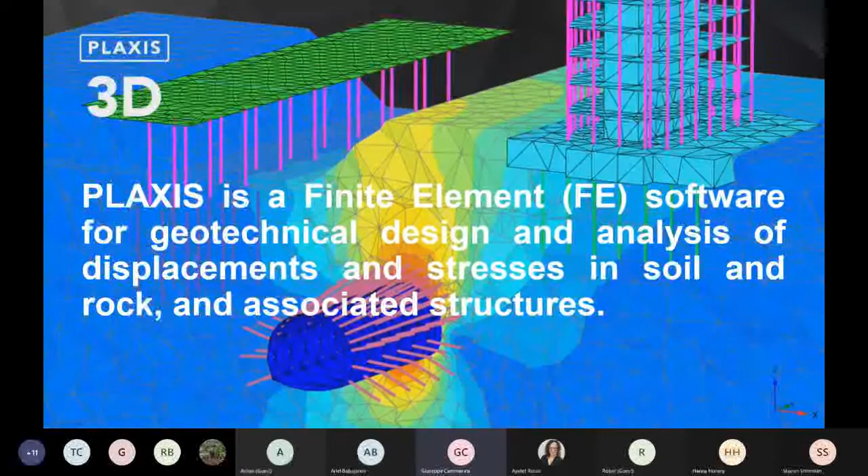So what are the features of a modeling software such as Plaxis that make it an efficient tool? The modeling approach has to be user-friendly with an intuitive workflow, but at the same time, the results of the calculation have to be reliable and thus based on robust developments and implementations.

Because geotechnical engineering deals with natural and complex materials, their behavior has to be accurately described through the most appropriate constitutive law. So a comprehensive library of material models is of paramount importance to benefit from advanced modeling. In addition, as anticipated, soil-structure interaction is crucial, and thus there is a need for proper structural elements simulation within the geotechnical framework. All of this is associated with the possibility for the operator to display a comprehensive set of detailed results. Finally, the tool has to be usable in every project stage.

As anticipated, Plaxis provides a user-friendly and intuitive workflow based on modes. There are five modes: the soil mode, where soil conditions are defined; and the structure mode, where structures and loads are created. The geometry is modeled via predefined structural element types and loading types using CAD-like drawing tools, leading to fast and efficient finite element model creation.

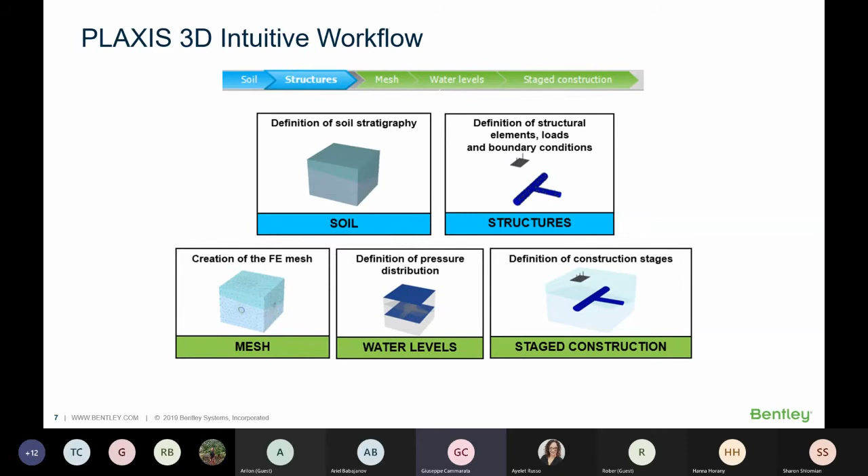For geotechnical simulation, the adoption of the most suitable constitutive law is crucial for the reliability of the results. Within this framework, Plaxis offers a comprehensive library of models for both soils and rock masses. In addition to standard models, it offers a set of user-defined soil models programmed in Fortran and compiled as DLL, and also provides the possibility to add UDSMs developed directly by the user.

Thanks to the soil test facilities in Plaxis, the user can carry out comparison of the behavior as defined by the soil model, based on the entered set of soil or rock parameters, with the results of laboratory and site investigation. This very useful tool is aimed at the optimization of model parameters such that the best fit is obtained between the model results and the test data.

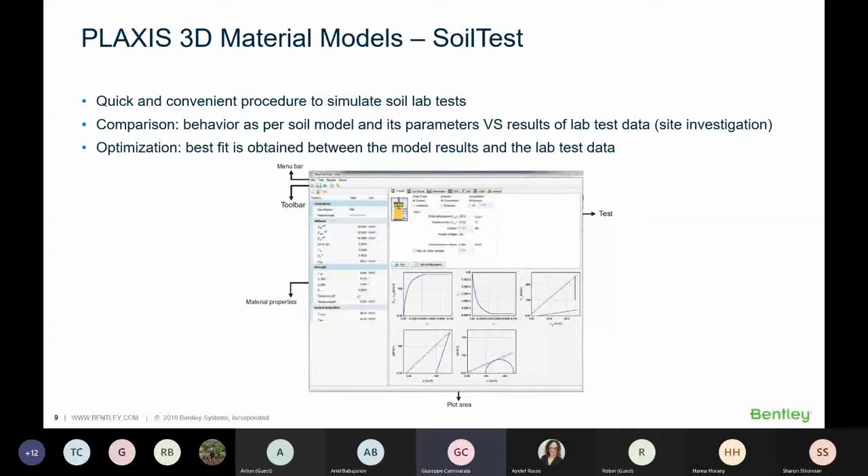In addition, as said before, soil-structure interaction is crucial, and thus there is need for proper structural element simulation. With this regard, Plaxis offers a wide range of different structural elements that can be easily used for any engineering application. To all of what has been shown so far, Plaxis provides powerful post-processing through the versatile output program.

This offers various ways to display forces, displacement, stresses, and flow data shown in contour, vector, and isosurface plots. Cross-sections can also be displayed, and graphs created, allowing a detailed inspection of the results.

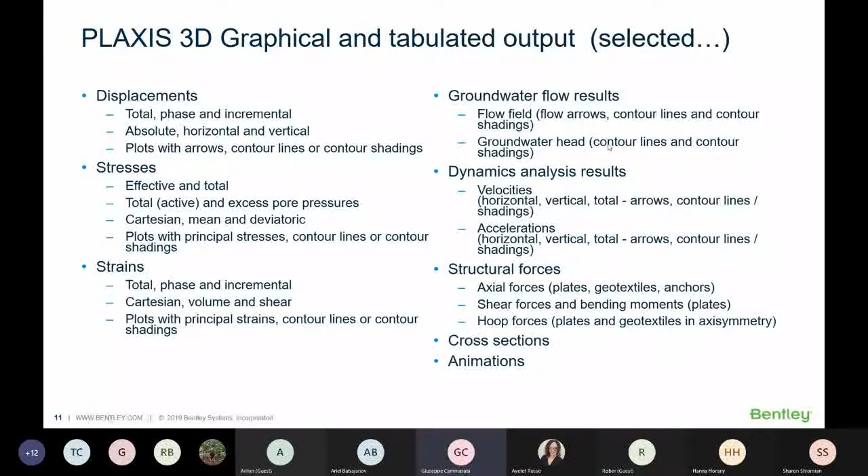Let's now have a look at Plaxis' advanced capabilities, starting from groundwater flow, which is an important issue in many engineering fields such as geotechnical, environmental, and hydrological engineering. With this advanced feature, users have the possibility of considering transient flow, performing different types of calculation where the interference between the flow field and the strain field can be taken into account, up to the level of fully coupled analysis. In addition, Plaxis offers various predefined properties to define unsaturated soil behavior.

Moreover, the user can also assign time-dependent variation of water levels or flux to model boundaries, as well as simulate various complex hydrological conditions. Applications would be, for example, excavation and mine dewatering, analysis of rapid drawdown, the effect of rain or flooding on slope stability, and drainage systems and pumping tests.

Plaxis has state-of-the-art capabilities for dynamic calculation. Dynamic problems may involve two different types of situations. In the first place, there are induced vibrations, which can be caused by traffic such as trains and trucks, by machines such as generators and wind turbines, or by construction work such as drilling and blasting. In the second place, there are earthquakes as a result of tectonic movement.

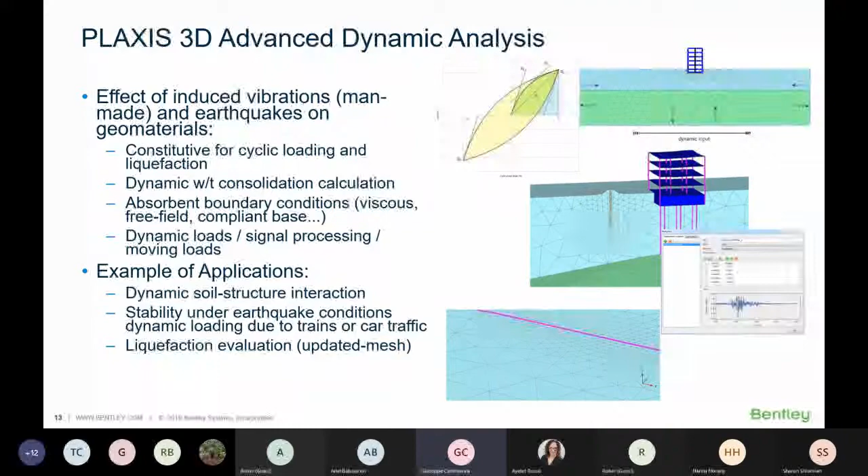Advanced thermal analysis is necessary when the effects of heat flow on the hydraulic and mechanical behavior of soils and structures need to be taken into account. In the current version of the software, the model is available in 2D only, but will be available in 3D in one of the next releases. Because of that, I will not spend more words on this feature for the moment.

So let's discuss now the reason for adopting 3D in design analysis by answering two classical questions that may be asked. Do I really need a 3D model? And what if I use a 2D model in any case?

Actually, only very few projects can really be considered 2D, and most projects have 3D effects. So modeling projects in 2D would mean that one forgets something, since it's hard to estimate whether omitting 3D effects is conservative or not. Generally, this is covered by applying all kinds of partial factors. This means that very often a 2D design is over-designed in order to cover the uncertainties of a 2D model for our 3D world.

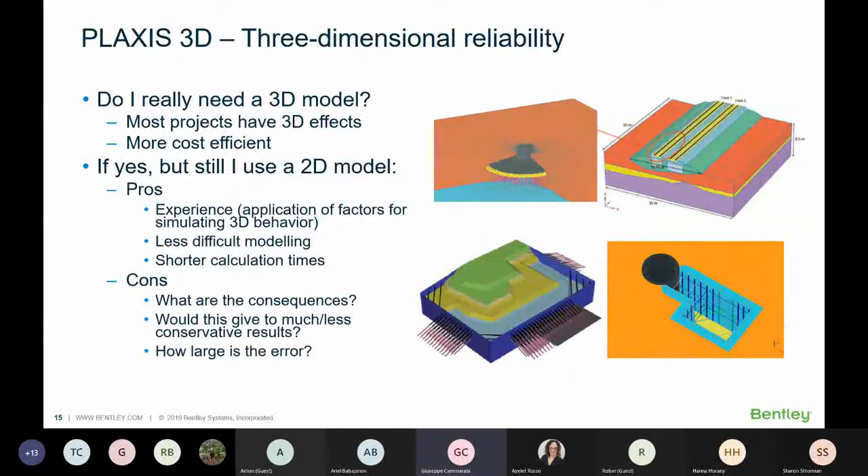In a 3D model, those extra factors are not needed, and thus modeling can be more cost-efficient than 2D. Let's try to better explain this with a very simple example sketched in this slide.

And by doing this, we accept to stand with the assumption of the plane strain model here reported. So one dimension is relatively long. There is similar geometry and stress or loading condition in any cross-section perpendicular to the long dimension. No strain perpendicular to the long dimension. No shear stress and arching perpendicular to this dimension. And the model represents one length unit out of the plane.

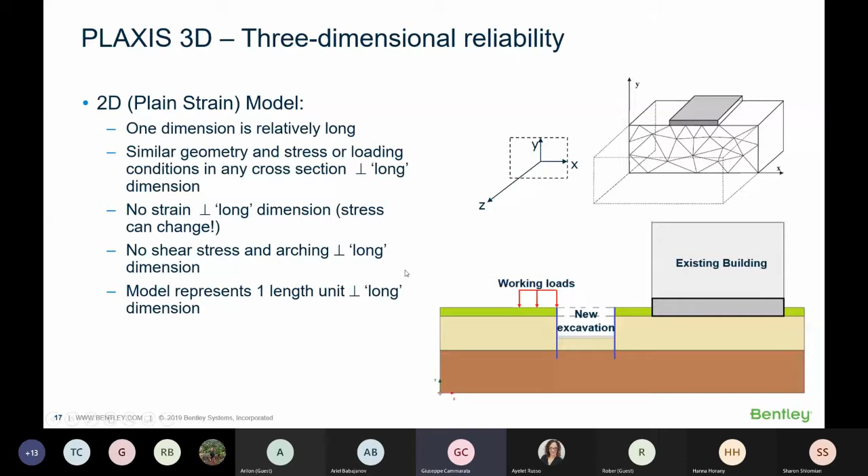It should thus be clear that by performing a 2D plane strain analysis of the situation presented initially, we are actually considering a 2D representation which cannot be considered as representative of the real one.

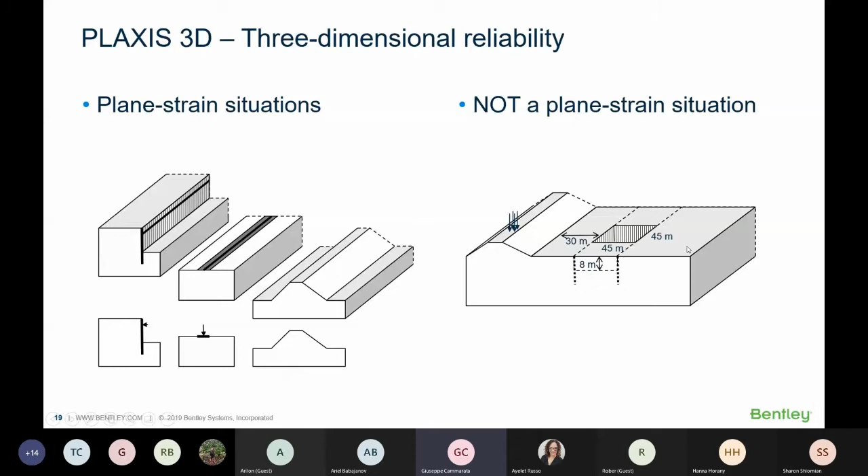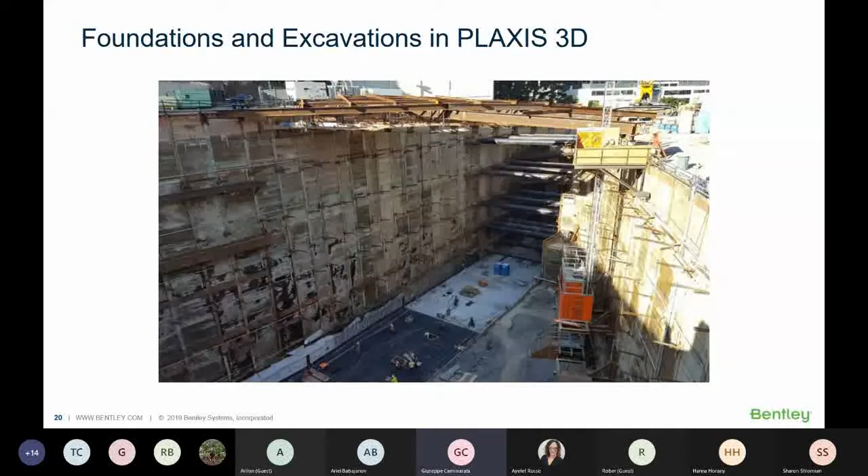Let's now show the peculiar aspects addressing modeling in 3D rather than 2D for several market sectors of civil engineering. The first is concerning foundations and excavation, which thus includes shallow, deep foundations, excavation, and a combination of the previous.

The first aspect that we have already previously considered and which might occur in any engineering project is the geometrical aspect, which includes also complex situations, such as the one shown in the slide where 10 basement levels are to be designed on a steep slope side.

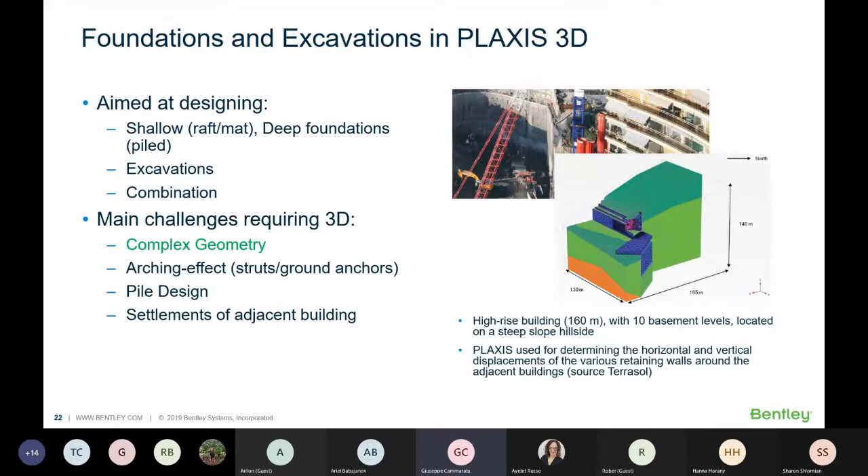High cost of traditional methods for stabilization of excavation pits encouraged engineers to study more about soil characteristics and their application. Arching effect is one of these characteristics that occurs in many geotechnical engineering problems, but does not always receive the deserved attention. In fact, it allows to provide safety and economy of project by optimizing the use of resources in the construction of discontinuous retaining structures.

When one is dealing with pile design, it is important to consider the behavior of the pile group. And for doing this, in Plaxis, the user can use the special embedded pile structural elements. There is also the possibility of simulating piles as volume elements, as the one represented in blue here.

But of course, there are problems when you want to simulate a pile group, because you will start to have lots of elements, which will be demanding in terms of calculation, but also with the possibility of bad element shapes in the finite element mesh. For that, the embedded pile, respect to the volume pile, allows you to simulate a large number of piles by taking into account all the peculiar behavior of piles.

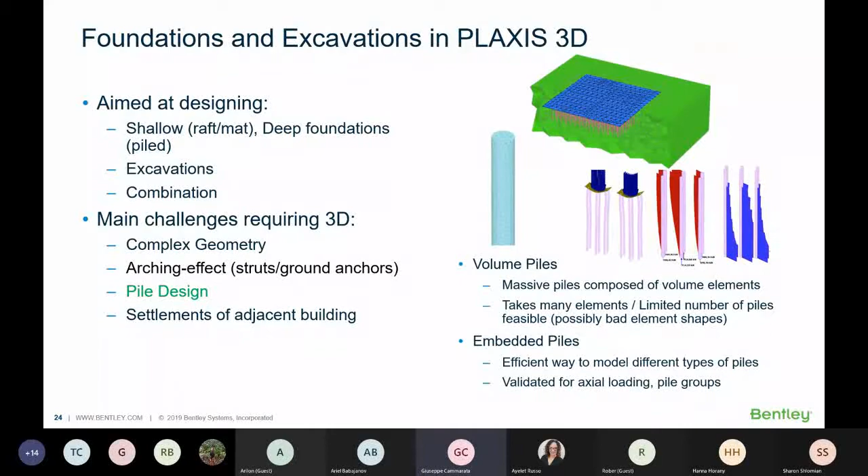So before continuing with the presentation, I want to show you an example of an excavation in the vicinity of an existing building. Other than the sheet pile walls, the shoring system is represented in the model, along with the different excavation level stages. I'll show how efficiently the visualization of results can be used for assessing the influence of the excavation and the forces on the structural elements.

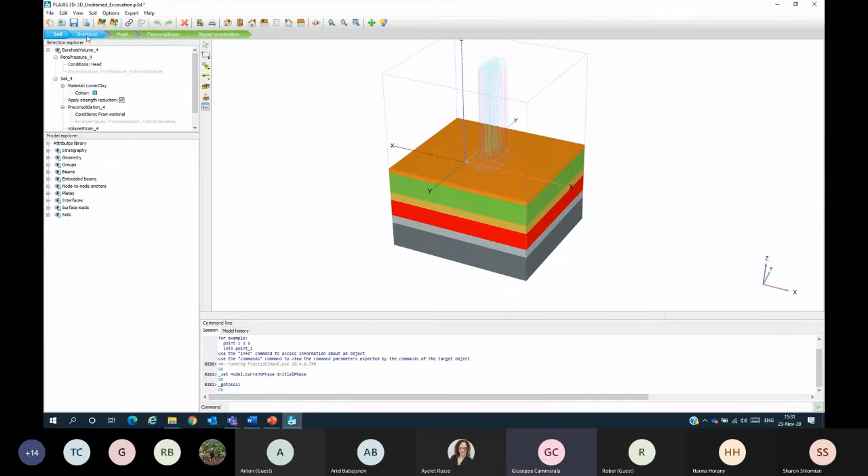Whilst in structures, as you can see, all the soil layers are now hidden to a certain percentage of transparency, so we can see all the structural elements that have been created. So here, for example, this is the excavation. Specifically, the brownish ones are the interfaces that are represented parallel to the surface. As you can see, they are not attached but detached, just in terms of representation.

So this is the excavation where we can see the different levels of the excavation. These lateral elements are the sheet pile walls. As you can see here, these are defined as SPW, which stands for sheet pile walls.

And we have, for each level of the excavation, the shoring system installed. So we have, for example, struts simulated as node-to-node anchors, and walings simulated as beams. We have piles of the existing building simulated as embedded beams.

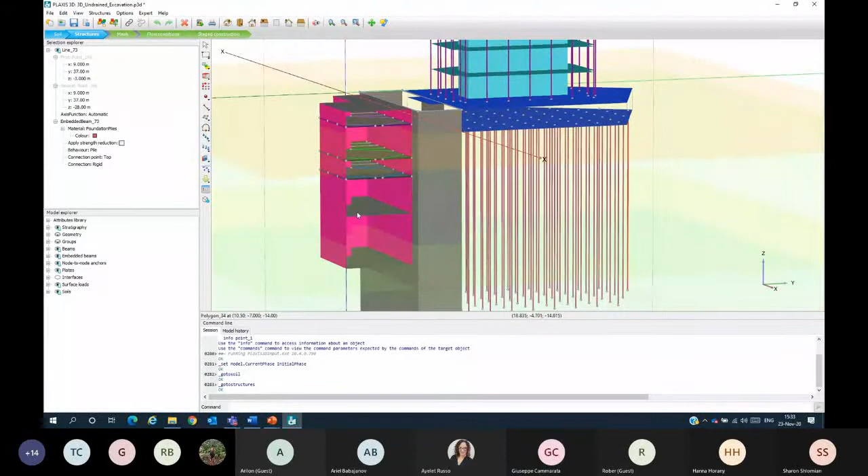In addition, as you can see here, there is this volume, which is not representing an excavation, but just a volume where we will refine the mesh, because what we are interested in is especially the interaction between the excavation stages and the existing building. So, as I will show you in the mesh mode, I will hide this portion, which is the volume between the excavation and the building, and it has been refined.

So the refinement of the mesh is performed through the coarseness factor, to which users can enter different values. Whenever Plaxis encounters structural elements, it will automatically increase the refinement of the mesh. So this value, for example, is 0.5, given by default by Plaxis.

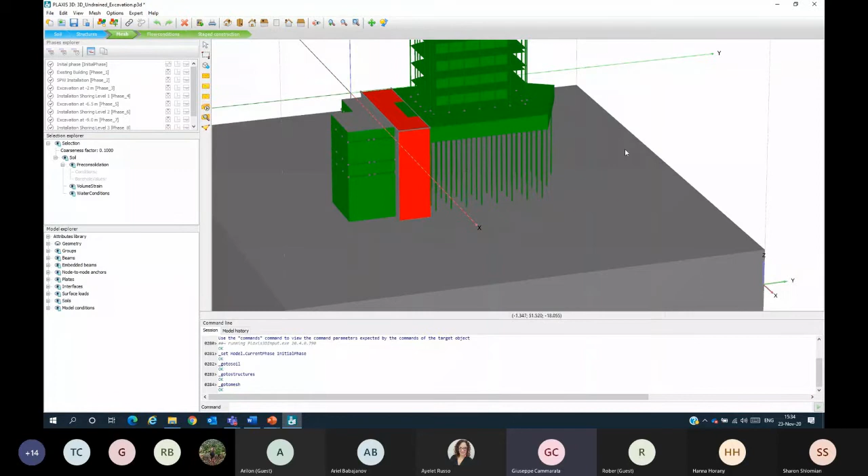Here instead, we acted independently from the automatic mesh, assigning a very little coarseness factor, which means a very refined mesh. So then we move into the stage construction.

So here in the stage construction, we start from an initial phase, which means the phase that will simulate the in situ field stress, the original, virgin in situ stress, so even before the realization of the building. As you can see, the building is gray, which means that all these elements are deactivated.

So the next phase is the realization of the existing building. As you can see now, it's colored, and this is considered our initial situation, not to be confused with the initial phase. The initial phase represents the initial condition of the soil, while the initial situation is where we also start from the situation where we are going to build the excavation.

So now we look at the different phases for doing this, and to facilitate visualization, I will hide the soil layer.

So as you can see here, these elements, the walings, are gray, which means they are not active. So we start, the first step would be the sheet pile wall installation.

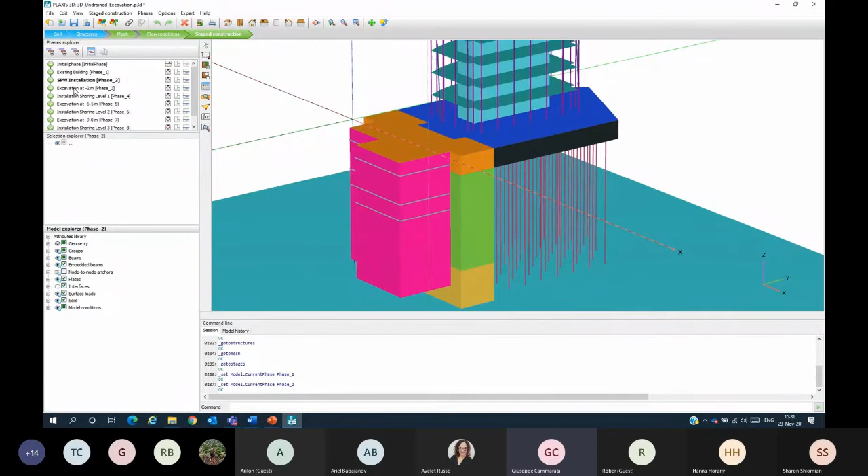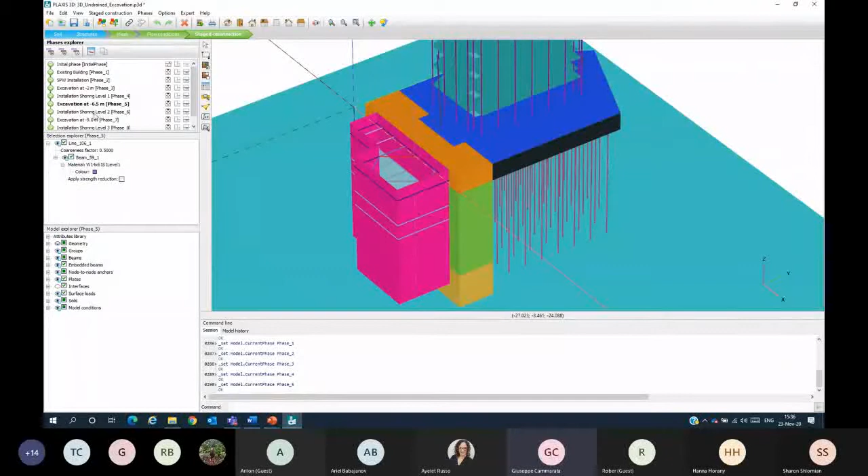We remove again the interface. Then we excavate, and we can see here the first 2 meters. These elements are deactivated, the shoring system is deactivated, which can also be assessed here because they are not flagged. So we install the shoring system of the first level, further excavate up to -6.5 meters, install the shoring system for that level, and same for the next stages of excavation up to -14.

So in this specific model, I move now into flow condition. We have a global water level, which is this one - this blue line represents the phreatic level.

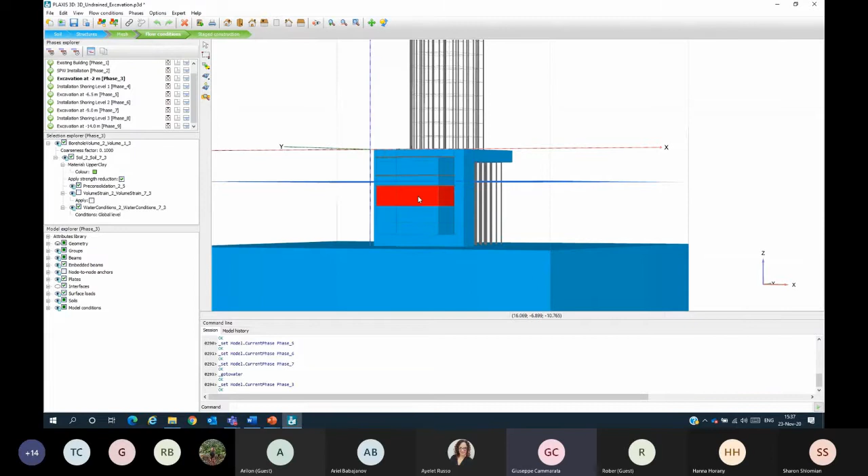So we are also simulating the dewatering. I'll show you: when we start, all this volume that will be excavated refers to the global level. The global level is this water level that is defined here. Global water level is the one defined through a borehole. If we go, we start...

Excavating - I will select this specific volume. You will see that once this volume is excavated, for simulating the dewatering, conditions of dry condition are assigned to this volume, whilst the volume below are assigned with interpolate condition, which means this is a feature that enables linear vertical distribution of the pressure from the boundary with the layer above to the boundary with the layer below, for the current layer.

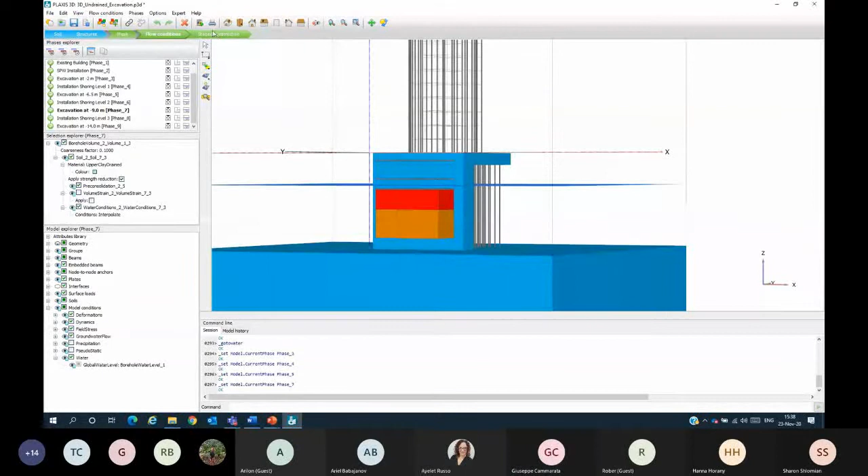So let's move to the stage construction again. Once we finalize the excavation, then we can start the calculation with this button. But of course this model has already been calculated, so I will directly move into the output.

So in the output, it takes a few seconds to get open. It's also a pretty large model. So first thing, you can see the mesh and how refined it has been done in between the two structures.

The first aspect I want to show you is, for example, we are interested for sure in the deformation, so the total vertical displacement that occurs between the two structures, at the bottom of the excavation. So from here you can see you don't see lots of displacement. The biggest displacements are concentrated at the bottom.

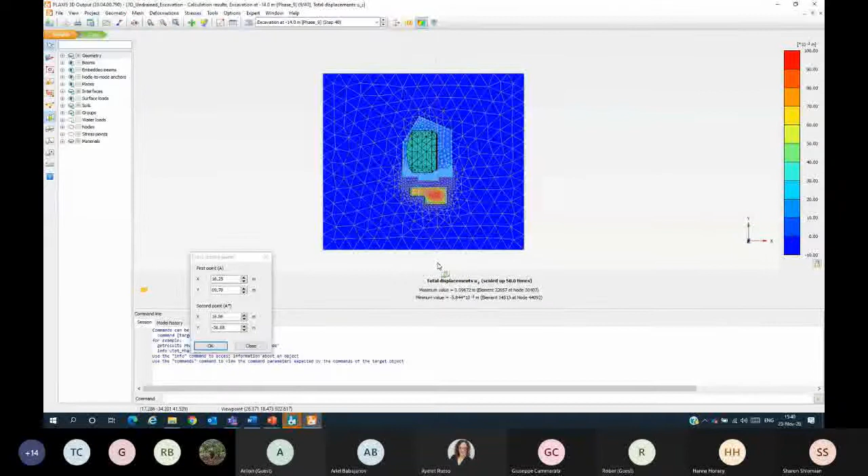You can also hide volume, but the best way to visualize results can be cutting a vertical section. In this way you can analyze section by section and phase by phase, because you can move into the phase. Is updating, yeah - so this is the phase where I have just installed the sheet pile walls.

Then when we excavate, we can also investigate the different sections by clicking Control plus and Control minus. So this section will move upward along the model.

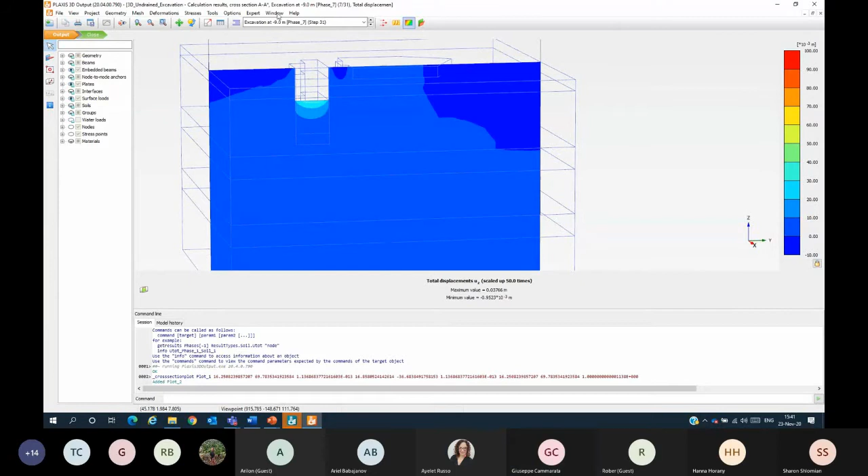And something we might be interested in, for assessing the impact of this excavation, is investigating what is happening in the foundation piles. So we will select them by drawing a window, and we will select the embedded beams. Okay, so here I'm visualizing the embedded beam.

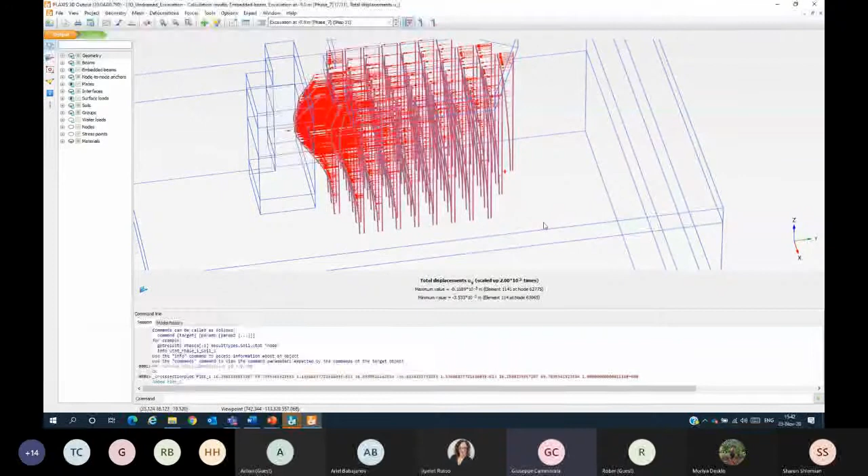So now I'm visualizing the vertical displacement, but it might be more interesting to visualize the horizontal displacement. And investigating them, okay, I will scale manually in a way that for sure we will have the same scale factor for all the conditions. So if I look into these piles, I can also investigate each single pile. We will see that from when just the existing building was constructed, up to the finalization of the excavation, the condition of the piles has changed.

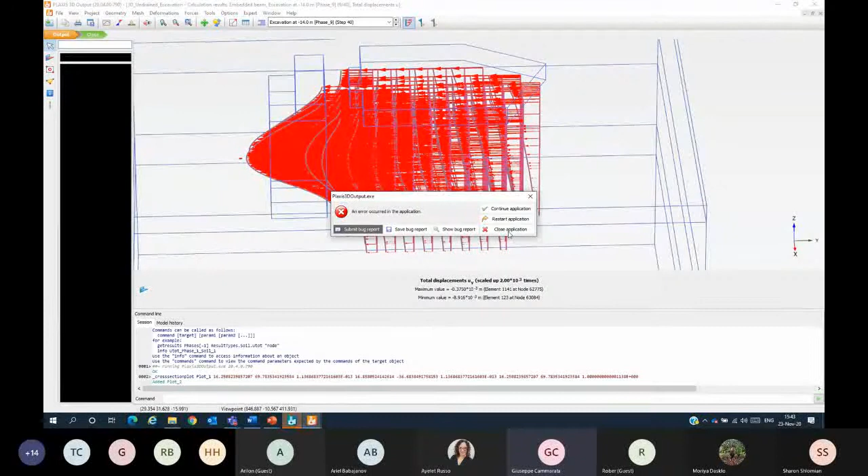Okay, so these aspects might be - I concluded this part of the demo. So in this way we can investigate what happened on the pile. You can also visualize, but I will show with the next example, also the bending moment of these piles. And this way, the users can understand and assess the situation of the existing structures and the effect that the excavation is giving to it.

I will now move back to the presentation.

Let's continue now by having a look at embankments and dams.

Within this engineering sector, Plaxis has been successfully used for decades, performing design analysis of railways, roadways, water retention, and flood control mitigation works.

These are, as already mentioned, generally linear infrastructures that comply with assumptions of 2D plane strain condition.

However, there might be the need for taking into account 3D in several cases, for example, when strong heterogeneity of the geological conditions is encountered, which implies strong variability of the geological layers.

Also in case of interaction with adjacent structures, and if the effect of moving loads needs to be considered. As previously anticipated, Plaxis 3D offers a special feature for simulating moving loads.

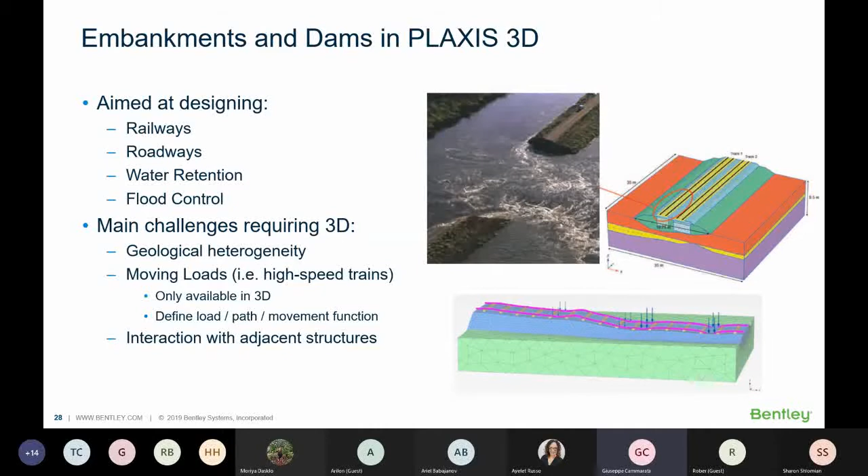I want to show you an interesting example captured in this short video that describes the usage of moving loads features for simulating the train passage over a railway embankment and its effect on a nearby buried pipe. If you don't hear the audio, please let me know.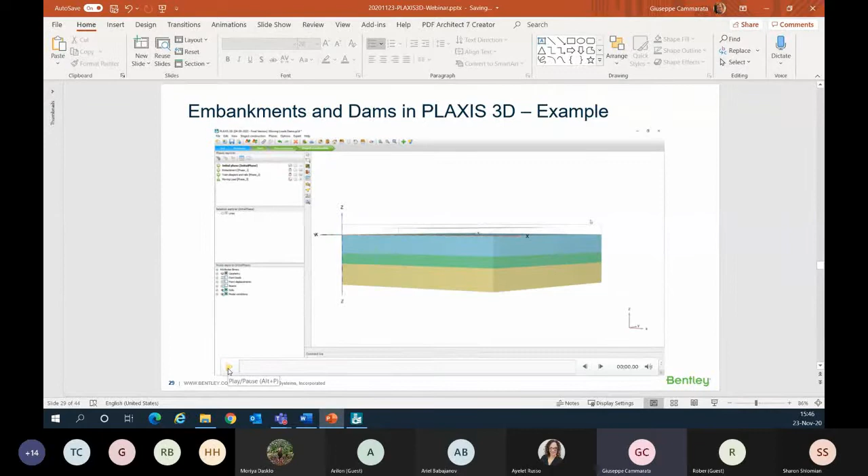Actually, it's not even starting. Let's see if this way works. Please let me know if you don't hear the audio. Giuseppe, we can see the video, but without audio. Ah, okay, sorry.

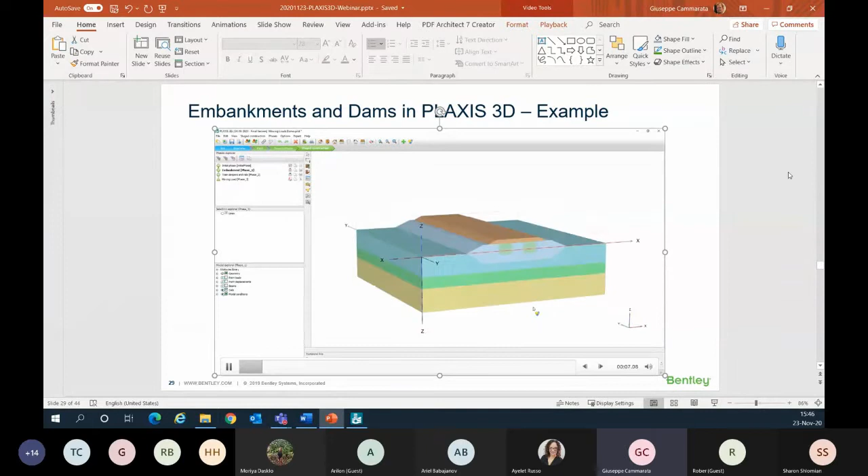Maybe now you should be able to hear it. So for our model here, we start with just soil layers, and of course we construct the embankment, because that's where we will put the rails and sleepers on.

We zoom in and can see these modeled by beam elements, adding the moving load functionality here. These are the loads of the carriages.

If we look at the load input, we see a special movement function, which shows a 35 meter per second train movement, roughly 125 kilometers an hour or 80 miles per hour.

We show the results for the deformed mesh, displacements, and actual forces in the rails, and we see the train moving in the calculation. Even after the train has passed, there's still some movement happening in the model.

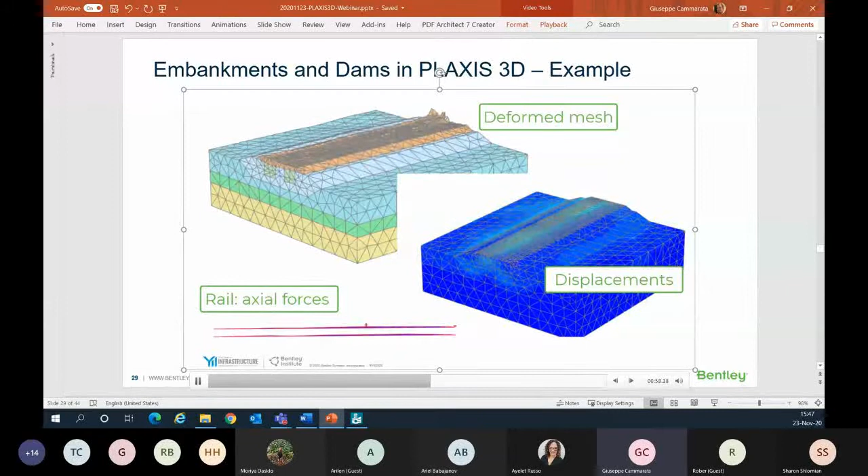Now, the second challenge we have to do is add the existing infrastructure to the model. Using the same model, we use the special extrude functionality inside Plaxis to get a pipe below the newly constructed embankment.

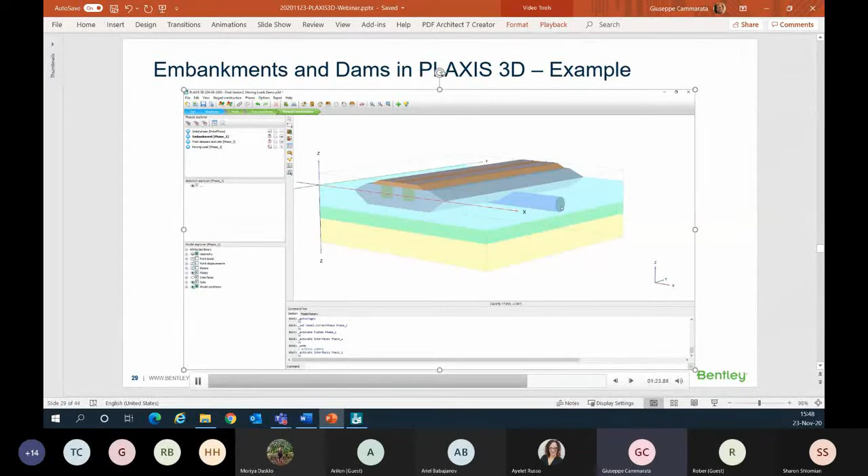It's also activated here in our stage construction. We run the analysis, we see our deformed mesh, and if you look closely, you can see the effect on the pipe in the results, but also the movement of the pipe, which is scaled up so it looks bigger than it really is. Also here you can see that the pipe still moves after the train has passed.

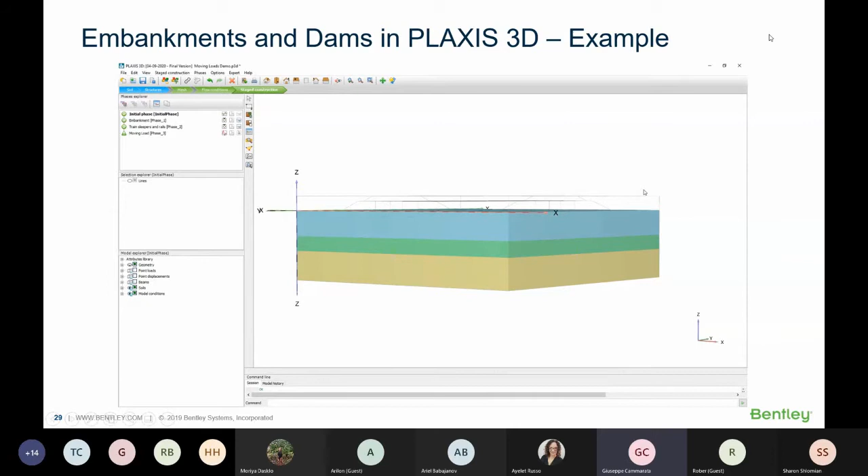By talking about buried structures, we now move into underground works in 3D, and with this we refer to the design of deep and shallow tunnels along with underground mines and storage caverns and cavities.

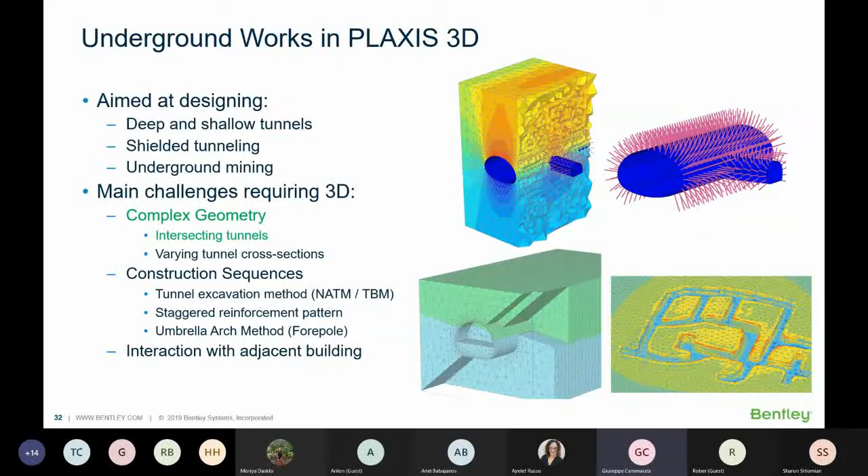Another example is when variation of tunnel cross-section occurs. In this case, loft polycurves and blend surface features can be easily used to provide smooth transition between non-homogeneous sections.

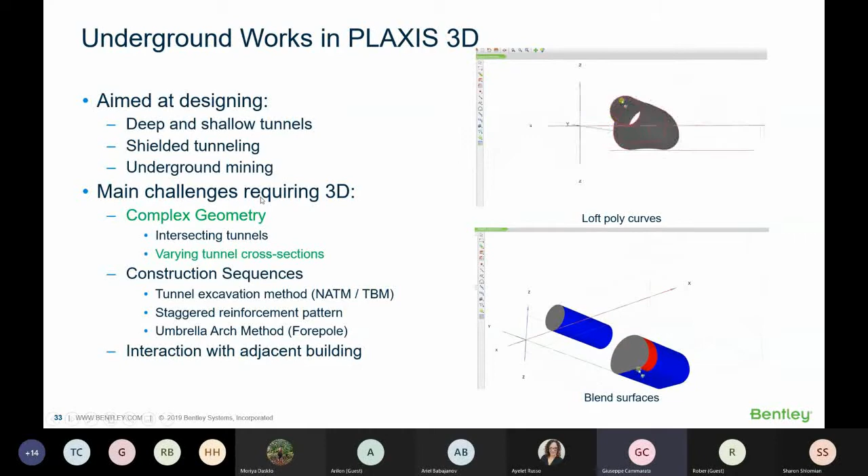For tunneling, it is important to accurately simulate the construction process of the adopted excavation method, which is generally modeled by using the principle of convergence confinement method, which addresses a 2D plane strain problem of the ground support interaction.

The evolution of this fictitious pressure is characterized by the confinement rate lambda, which depends on the distance z between the considered section and the tunnel face. The lambda value depends on many factors: ground condition, length of unsupported section, advancement rate, and experience.

So on the other hand, and I hope now the video will start. No, I have to exit from the slideshow. Sorry, but it's the only way for running the video. I don't know why.

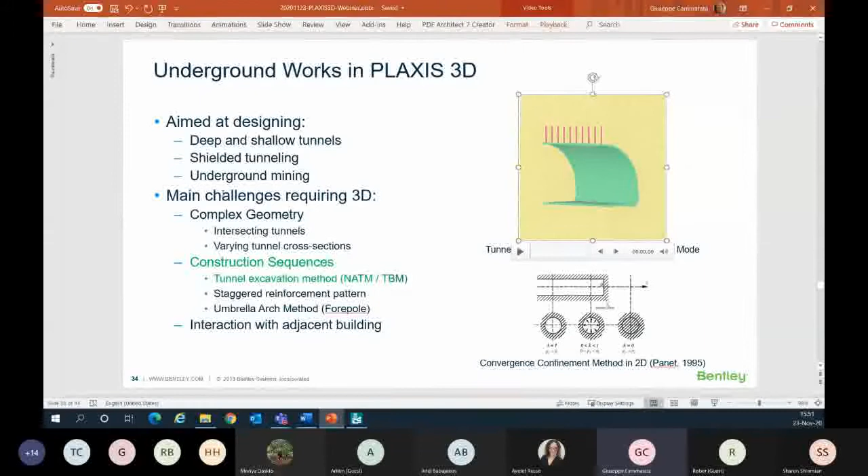Reliable modeling of construction sequences is also important for reinforcement systems, such as when reinforcement is installed with a staggered pattern, or when the umbrella arch method is used to increase excavation front stability. As a consequence, the interaction with other existing constructions might require the accuracy that can be captured only with a 3D model.

With this in mind, I'll now show you another example of tunnel excavation planned in an urban area. The design tunnel is excavated in between two existing structures, and all the excavation stages along with the reinforcement system and the support with lining are simulated.

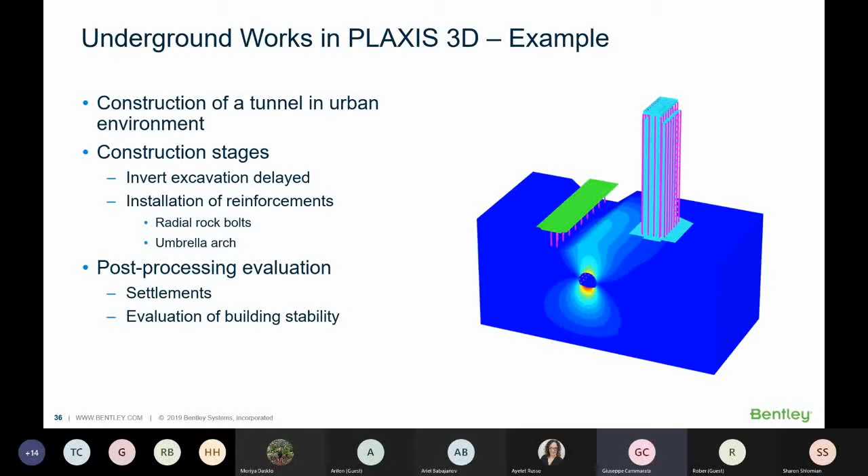This is the model, I hope you can see it. I won't go through the different modes again, but just for the soil, I want to show you that for simulating these non-horizontal layers, the concept of boreholes was used.

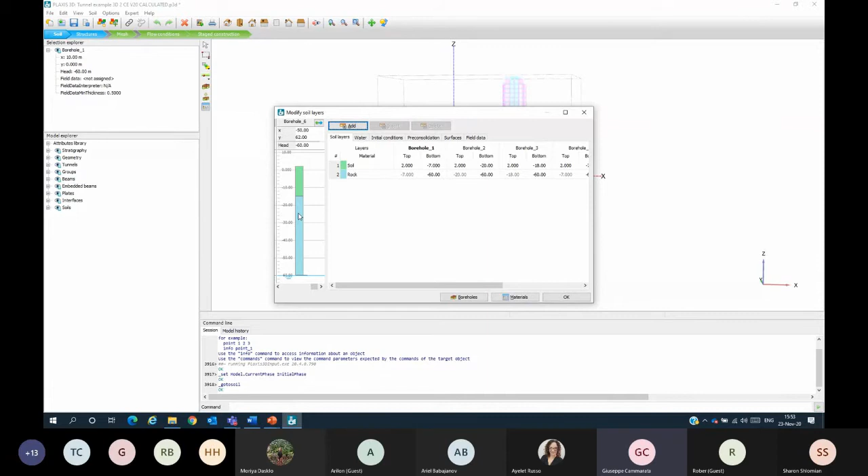Three boreholes were simulated, and they can be seen here. So we have three different boreholes where the stratigraphy has been defined with different depths, and this at the end will provide a non-horizontal layer.

Then in the structures, we define all the structures that we will look at later. As you can see here, we have defined all the reinforcement and lining system.

So how was this achieved? For doing this, referring to the tunnel, we used the tunnel designer tool, which is composed of four different modes.

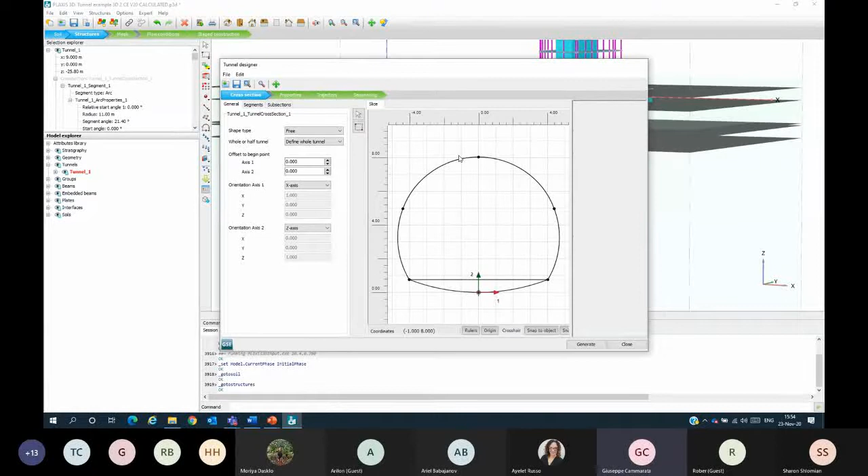So in the cross section, we define the outline of our section.

In the properties, we define both the support as liners, and as you can see here, this has been simulated as shotcrete, and also in reinforcement we have simulated the rock bolts and the umbrella arch.

In trajectory, we define the direction of our tunnel. In this case it's just a line, but you can also imagine having a curved trajectory, and you can draw that as well.

Here we also defined the slices, which means the different stages of advancement of our tunnel. So we split the trajectory into a certain amount of advancement, which will correspond to the slices of the construction stages, as we will see later.

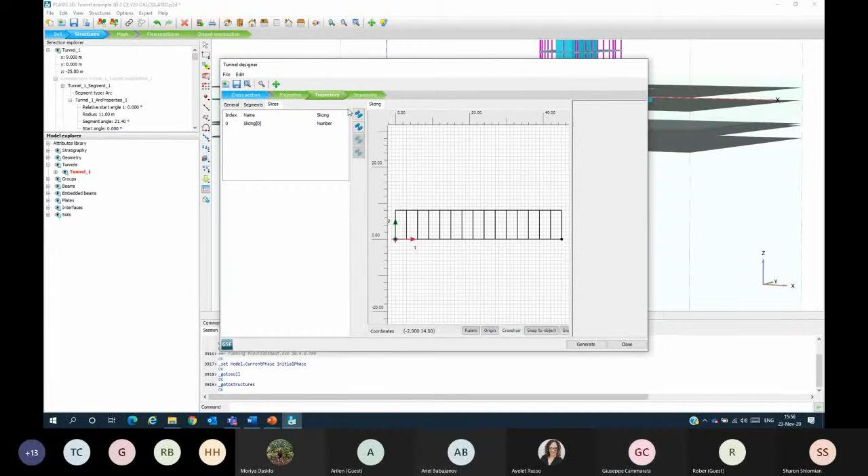We also define the sequencing of the construction of our tunnel, so we will have 4 steps, and these 4 steps will be looping through the construction of the tunnel.

The first step is excavating the upper part of the tunnel. Step 2 is installing the reinforcements. Step 3 is the upper part of the liner installation, and finally we excavate the invert and install the liner.

I will skip the mesh mode, since the concept is exactly the same as described before. As you can see, all the mesh concerning the tunnels has been refined. So we can now move into the stage construction.

I will hide the soil so we can concentrate on the tunnel. Here, as you can see, we are in the initial phase where everything is gray, also the existing building. In phase one, we have the existing building above the tunnel, but everything regarding the tunnel is still not active, it's still deactivated.

As you can see, all the umbrella and reinforcement is gray. You do not see any kind of excavation yet. And we start with phase two.

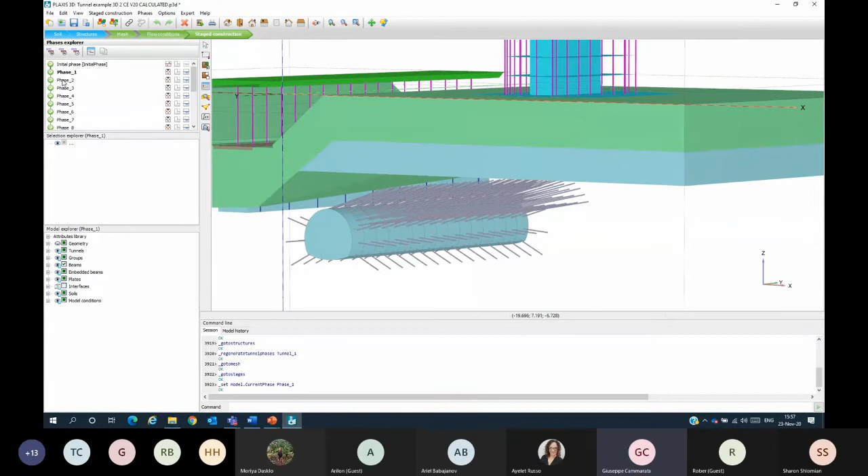Phase two is the first part of the excavation, which corresponds to step one in the sequencing we defined. So in the next phase, we will have...

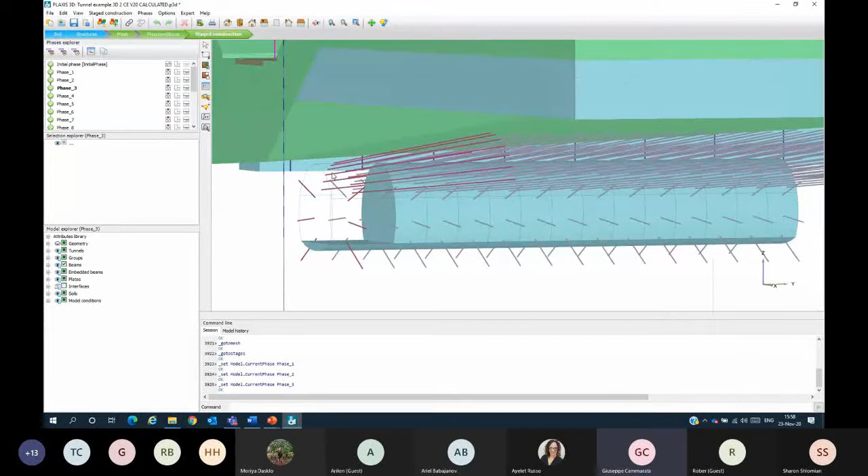Another section has been excavated. This slice will follow step one in the sequencing, whilst in the first slice we are experiencing step two. Then in phase four, we will experience here step three, which means installation of the liner, here step two, and here step one of the sequencing we defined, and so on.

So now in phase five, this will be excavated and the invert liner will be constructed. Here we will activate the reinforcement, and here we will have the upper portion of the liner.

And so this is the interface. I can hide the interface and so on, this way, all interfaces.

With all these phases, sorry for the interfaces that keep coming, we define all the different construction stages.

So let's now have a look at the output. Hopefully the output will not crash again. If it does and I have not finished, I will restart again.

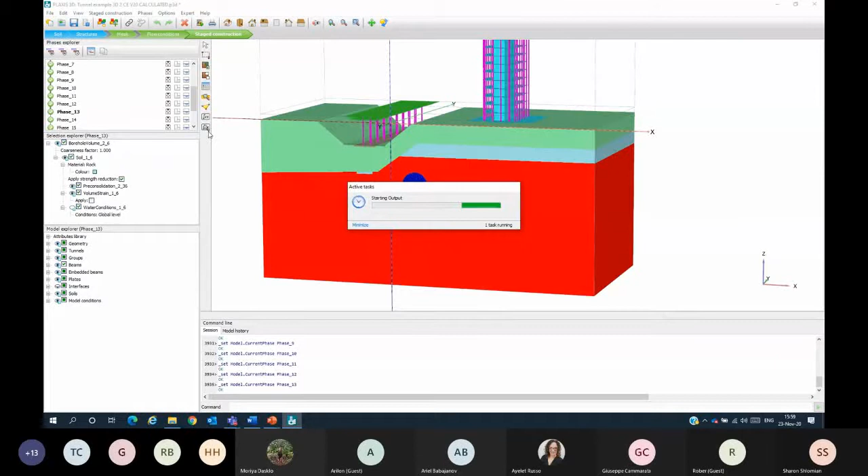So what I'm going to show you is the default plot when the output is open, which is the default mesh. Here you can see that it seems to be collapsing, but that's just due to the scale. So we will change the scale and bring it to a more realistic one.

So here you can investigate different aspects, starting from phase one. You can look into deformation and stresses, create curves, and export the information you plot in your output.

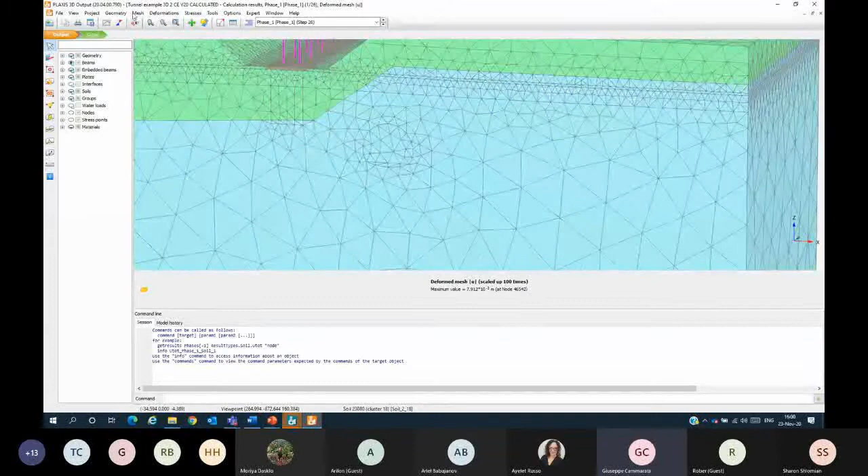Now let's look at the vertical displacement. This is the initial condition. As soon as we start excavating the tunnel, we'll see the concentration of displacement move into the zone around it. The bigger displacement will be in the zone around the tunnel that is being constructed. If we move to a more advanced phase, and visualize it in 3D, we see the displacement will increase.

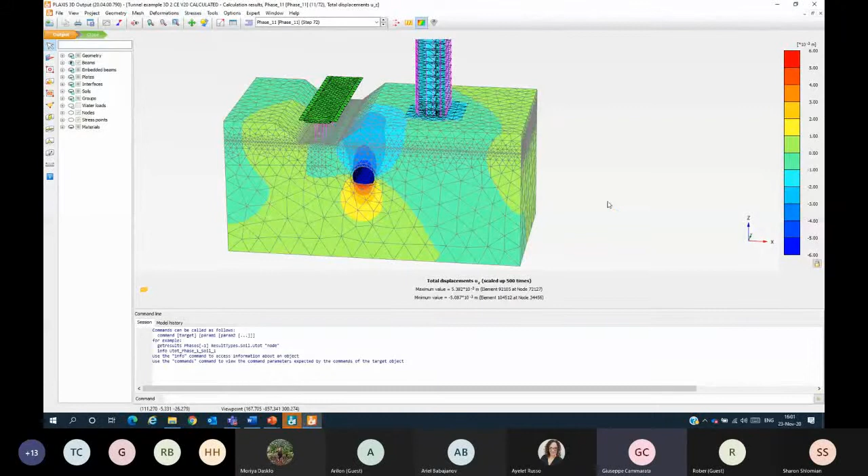So now it's plotted, and a good way to investigate the model is to cut a vertical section. If we create a vertical section here and view it in the front view, now we can clearly see what is happening.

For this phase, we can move the section back and forth to inspect what is happening. As I move forward, the displacements are reduced because the tunnel has not been excavated yet in that direction, so it's just getting the effect of what has been excavated so far. This can be done for any phase.

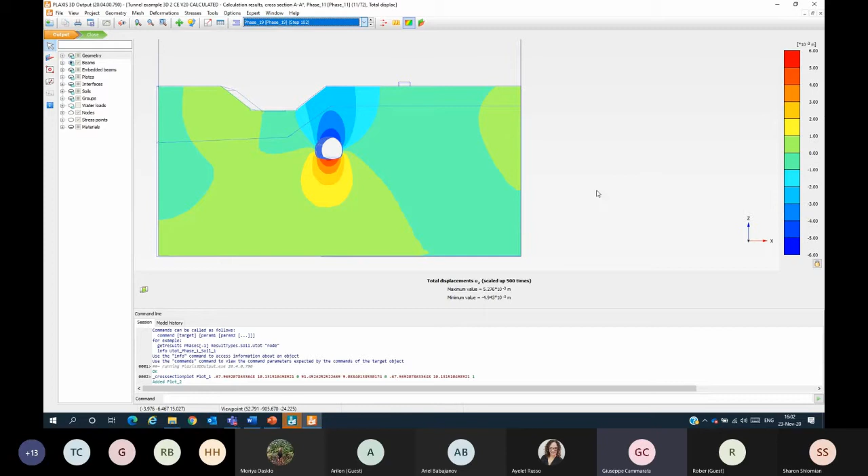Let's go into the last phase. As you can see, the displacement will increase for this specific section, and again you can move through it. This is the best way to visualize how the section is moving.

Something else I want to show you, which I unfortunately didn't have the chance to go through before, is the effect on the foundation. So we select the foundations again - embedded beam, select, enter. Here, for example, if we visualize the horizontal displacement and put a scale which is the same for both, apply.

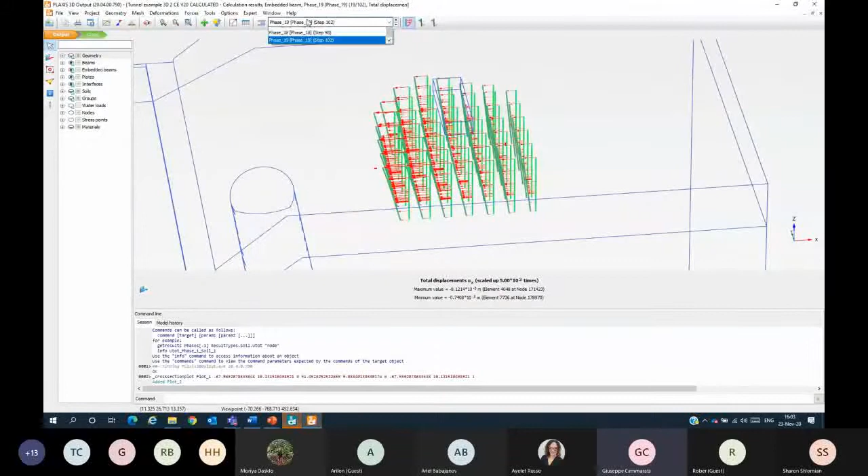So you can see the effect of the excavation on the displacement of the piles, which in turn means that this tunnel might affect the stability of the foundation, so this needs to be investigated. As you can see here, by moving through the excavation phases, the displacements are increasing.

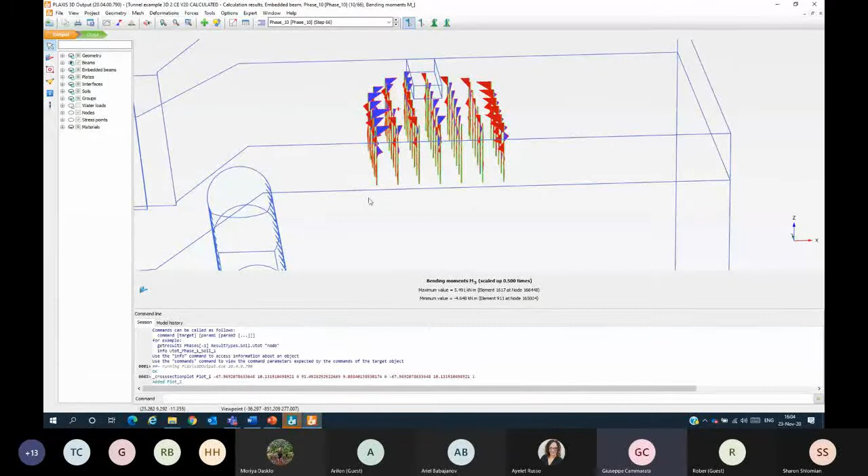You can also investigate the forces in the piles, like bending moment, again going through the different phases. I forgot in the previous example to show you that bending moments can also be visualized in the sheet pile walls. This is useful to understand what kind of force is present, and also to visualize the 3D effect due to the different corners characterizing the geometry of the excavation.

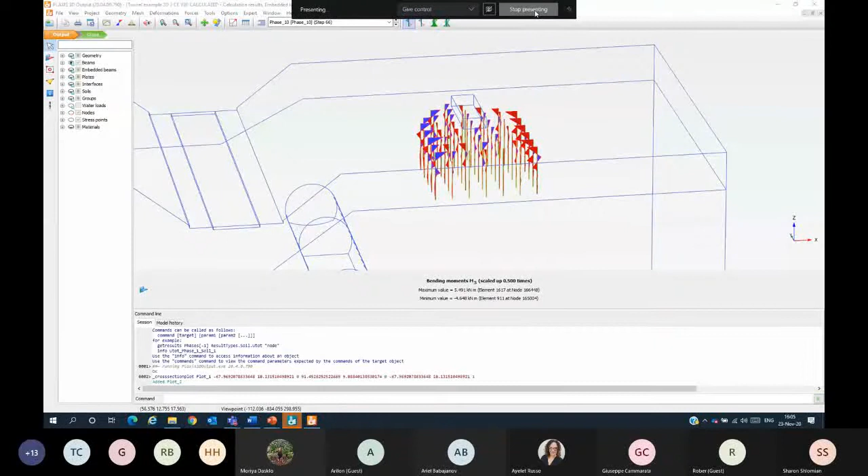Okay, so now going back to the presentation, there are just a couple more slides. Another sector where...

Plaxis 3D has been successfully adopted is oil and gas and offshore. Plaxis can also be used to perform settlement and bearing capacity analysis for onshore infrastructure like petrochemical plants or LNG tanks, as well as offshore geotechnics. In offshore geotechnics, most problems benefit from three-dimensional analysis, as it fully captures the complex interplay between the soil and structures under various loading conditions and its effect on changes in stress and pore pressure.

Plaxis also offers several constitutive models dealing with undrained soil behavior, as already mentioned, typically encountered in offshore engineering. Finally, there is also a special software called Plaxis Monopile Design, also known as Plaxis MoDeTo, which is a specific tool introducing an enhanced design method for monopile foundations for offshore wind turbines. Plaxis MoDeTo has been demonstrated to lead to a significant reduction in the amount of steel in each monopile, and as such, in the overall cost of any wind farm.

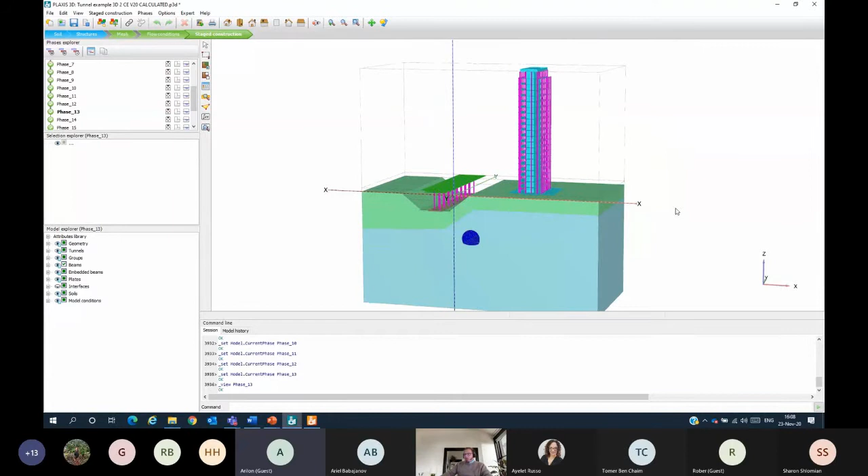I'll share my screen. So for the building, this is a representation of the building in this specific model where we were mainly interested in seeing what was going to happen in the foundation. We could also have to simulate just the pile. So for the pile here in this model, I used...

One second there. I used the embedded beam. It's here, so these are embedded beams.

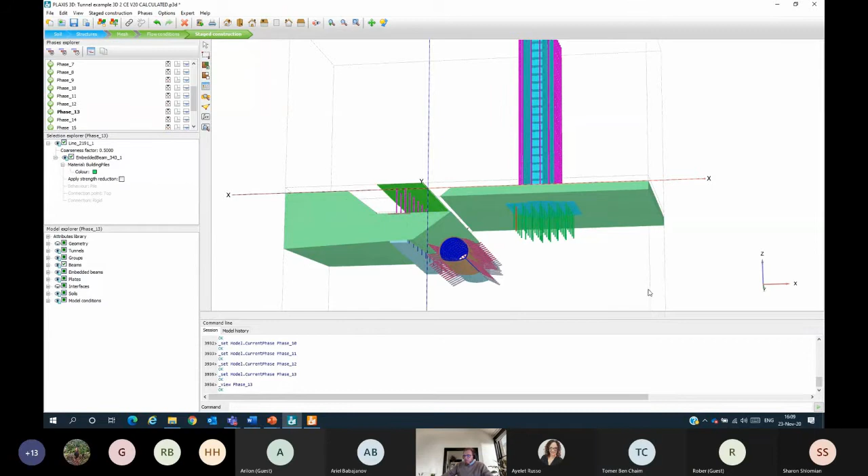Okay, and I guess you want to know how they've been characterized. So for doing this, here in the material sets, this window concerning the materials can be visualized in each of the modes. It's actually the only button that you will see in all the modes. So here you characterize your materials, and this is the typical material set window where you define the properties of your embedded beam.

So the type of beam, geometrical properties, as well as mechanical properties, like for example the axial skin resistance, which means the lateral resistance and the base resistance.

So for example, for the tunnel, the liners here are simulated through plates. So if we go here and move into the plates, you will see shotcrete. So shotcrete has been defined as a plate with elastic properties, so you just have E, nu, and G to be defined, but you can also define the plates with elastoplastic properties, by also indicating the yielding stress.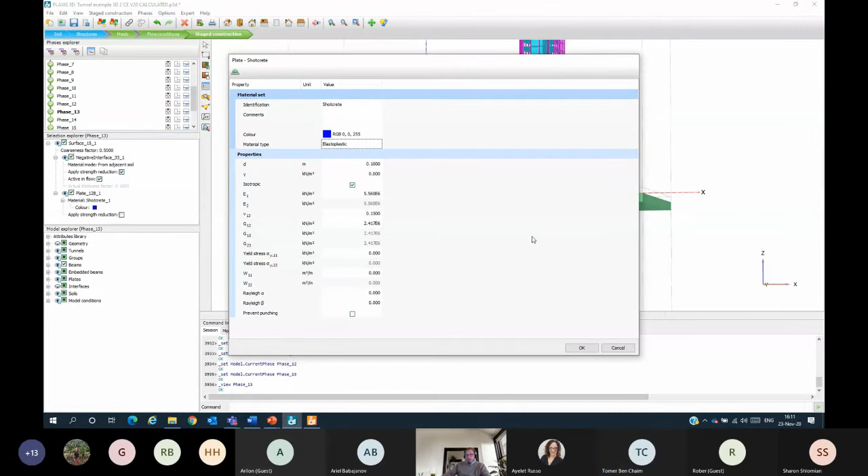Now it would be also more useful, I guess, moving into the other model. So if you wait, this way I will also show you what I forgot to show all of you. It will take not long. Okay.

For the sheet pile walls, we adopted again plates. So here, if we go and look at the plates, this is the sheet pile walls that have been used for simulating the sheet pile walls. Same as, for example, a plate was also used for simulating the concrete mat of the foundation of the building.

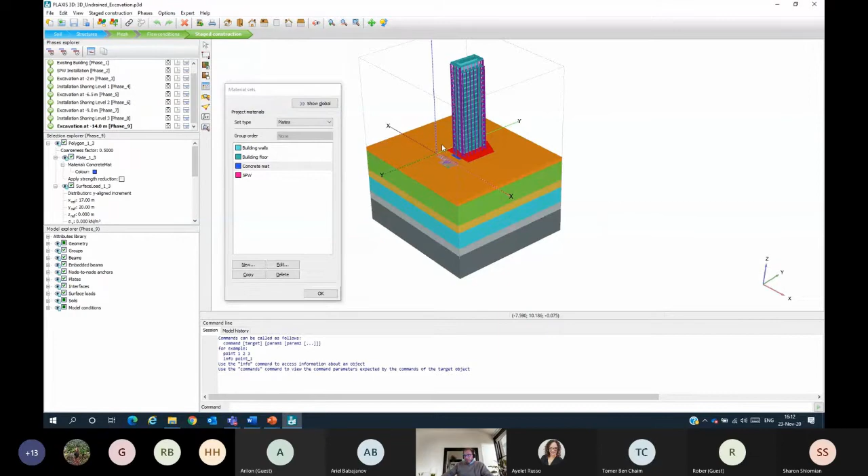So let's say that there are a certain amount of structural elements that are very flexible, and these can be applied to different situations. So other elements that were not, for example, adopted in the tunnel model are these: the struts. The struts have been modeled as node-to-node anchors, so they are defined here as anchors. These are the different struts that we defined.

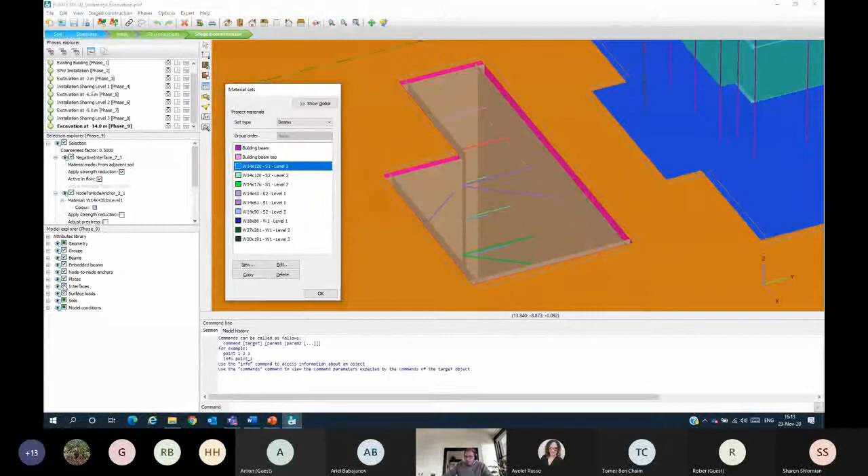In this case, as elastic. Again, here you can simulate as elastoplastic and elastoplastic with residual strength. In addition, we have beams that we applied to, for example, the walings. Here these are... now if I remove the interface... so here, these are, for example, a beam representing the waling surrounding the excavation.

Thank you. You're welcome.

We have more questions for Giuseppe. Just a second, we have in the chat window a question from Doya. Are the dynamic loads option in the advanced 3D program or in the basic? It's in the advanced, okay.

The dynamic option has not been part of the basic option for the suite, and I can expect that it will not be in the future as well. So dynamic is pretty advanced in terms of options, so it's not part of the basic Plaxis 3D.

Okay, thank you, thank you. I have another question, if it's okay. Sure, okay.

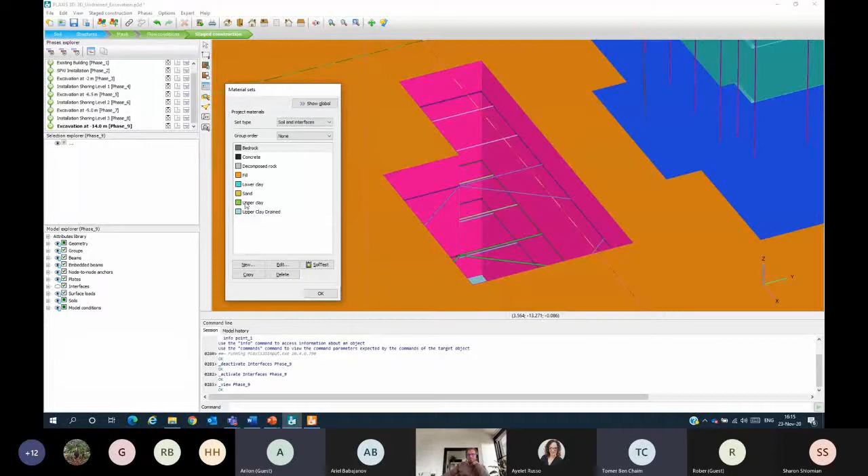So I'm asking again about when we are trying to deal with soft ground, so we have a behavior like heaving or something like that. And actually the big problem is with the failure criteria, and we have trouble getting all the parameters we need if I want to use a hardening soil model, let's say.

So your point is that you already use Plaxis, I guess. Not Plaxis, but I'm asking if there is a tool that Plaxis provides to help us get the right parameters that we need for this criteria. Ah, okay. So actually the best tool available in Plaxis... am I still sharing my screen? Yes. Okay, perfect, so I will bring this up. I think it's actually the screen and not just the model.

So it's the soil test facility. This facility is actually aimed at helping the users calibrate the parameters that have to be entered in the model in order to fit the available data on the behavior of the specific soil.

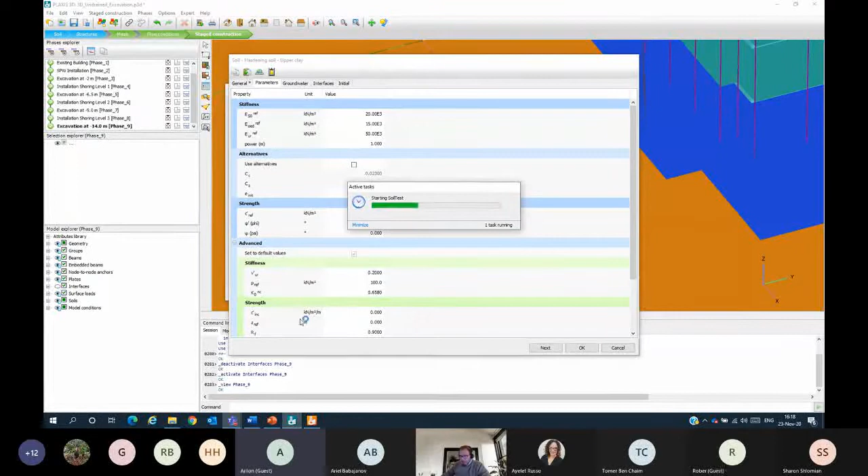But what you can do, if you have in mind how your material should behave, is investigate the behavior of your material by running this soil test facility. Whenever you are here, this is hardening soil, you have defined all your soil parameters, and you move into the soil test facility, you can inspect in terms of behavior what these parameters mean.

So you can simulate different types of tests, including tests in dynamic conditions. And here you might investigate understanding whether what you are getting is fitting what you have in reality, or at least fitting what, in your opinion, from your engineering judgment, the behavior would be for that specific soil. Did I answer your question?

Yeah, this facility is really, really powerful. As you can see here, there are several kinds of different tests that can be simulated with this facility. Of course, this is simulating a test, so this is not a finite element tool. This is for calibrating the soil parameters against available data from investigation or engineering judgment from professionals.

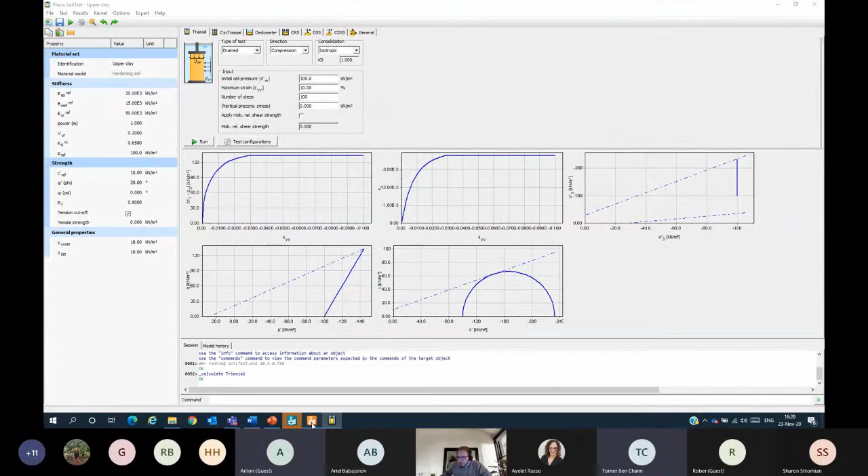Thank you. You're welcome. Thank you. Is there any other question?

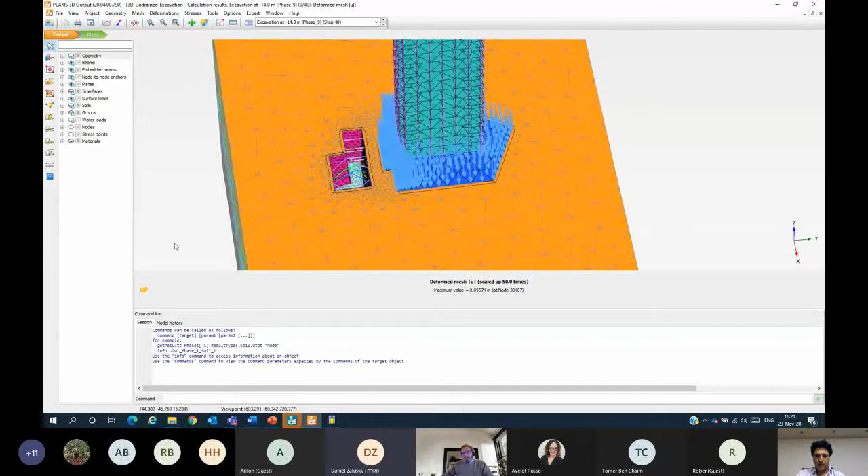The rule of thumb for laboratory tests in order to determine these sophisticated parameters. Oh, okay, or maybe can you get specific for the project we're seeing? How many soil CU tests took place there? Okay, so this is a demonstration and it's not a real case actually, just to be clear.

So the rule of thumb usually comes with experience. Unfortunately it's not our task to provide this kind of professional advice, because rule of thumb depends on experience and is strongly based on engineering judgment. What I can tell you is I'm not able off the top of my head to give you a specific rule of thumb for each parameter, but there are authors in the literature who have investigated and provide some ideas on how this material can be characterized. Of course it depends on the specific soil conditions. So what the professional can eventually do is look into the scientific and technical literature for similar conditions to the one that applies to his site, and then try to use those for the modeling.

This kind of advice goes completely beyond what we actually provide, because we provide the tool, the finite element tool for performing that analysis, and the user has the possibility to enter the right parameters to properly characterize the soil with that advanced tool. But we do not provide rule of thumb parameters for the different cases. If you use Plaxis, this is the same in the manual. The manual describes how the advanced constitutive law works, but never provides rule of thumbs.

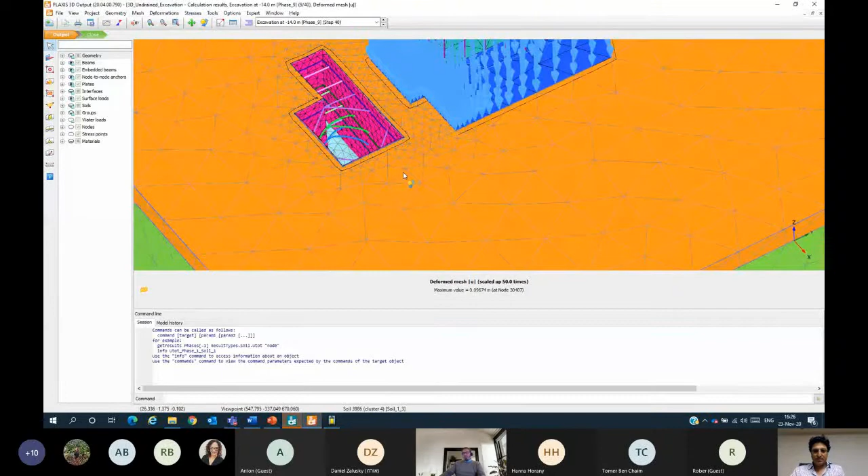As well as all the soil conditions. In any different situation you will have different soil conditions. So for one model you might get a certain percentage difference, maybe 20-30%. For example, if I cut a section here... if you cannot see the screen, let me rephrase my question: does a 2D problem give a bigger factor of safety, does it give a more conservative result?

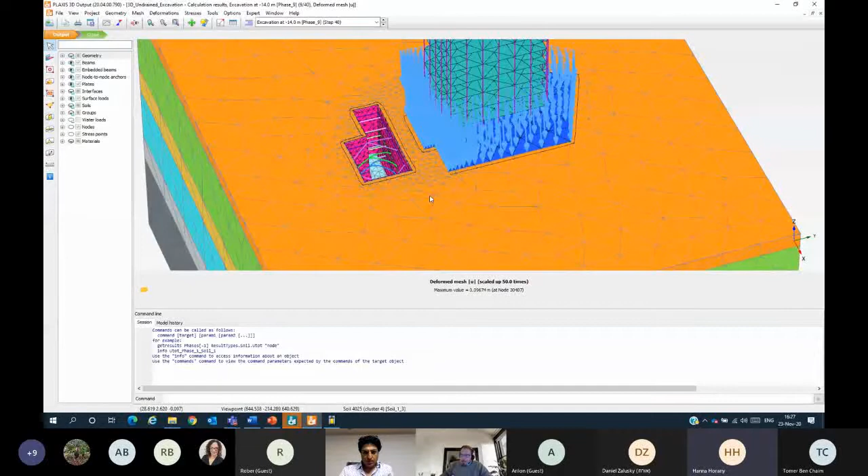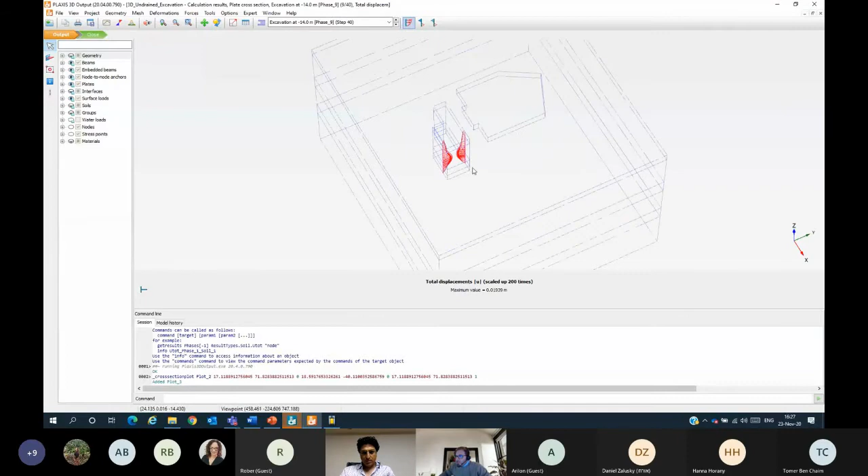You usually have a more conservative result, yes, and that's why I want to show you this. Can you see my screen now? This was actually a very important aspect I wanted to show you before it crashed. Look, these are the sheet pile walls. Now I'm going to cut another section here.

Okay, this is the section of the sheet pile walls, and now I'm going to show here the bending moment of the sheet pile walls, for the last phase. So if I investigate the sheet pile, I'm just plotting the bending moment. I can also plot the horizontal displacement so the effect will be shown. When you move up and down you will see this is the maximum bending moment you're getting.

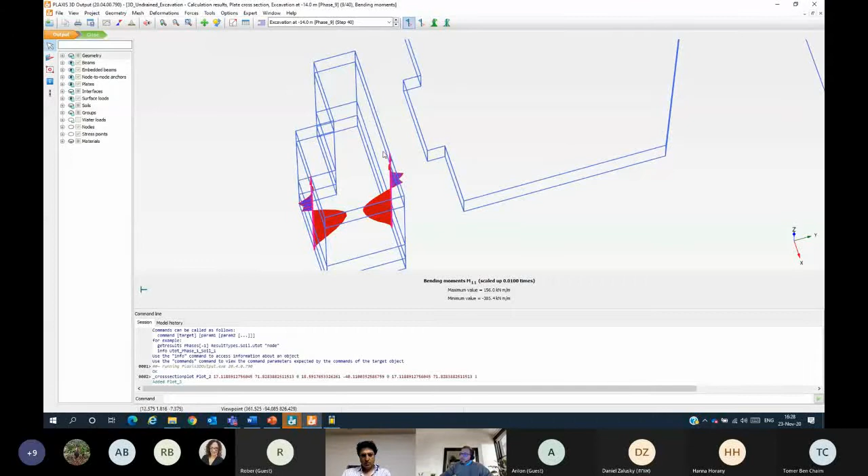If you move your section, your sheet pile wall is getting less force. So if instead you run a 2D model for this example, you would assume that 1 meter of this slice applies to the entire excavation, and you would be forced to design your sheet pile walls based on the maximum bending moment. This bending moment is very likely lower than what you'd get with 2D, because this also captures the effect of these corners. But this depends on geometry and is project based, so depending on the project you will have a different percentage in the conservativeness you're getting.

Okay, thank you very much. You're welcome.